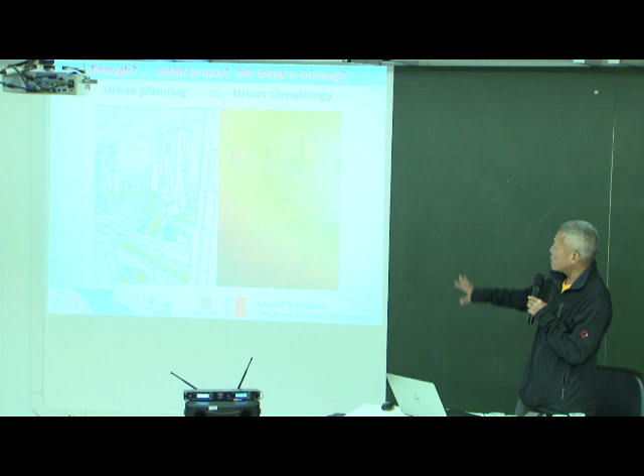So this is the first slide. On one side, a lot of the city planners will draw this kind of diagram to show how nice a city should be or will be. On the other side, the meteorologist always tells you the problem of the city in another way. In this particular case, the pollution problem, and we are dealing with the same thing, but we have a different kind of what we call language, and this is the most fundamental problem when we work with people like them.

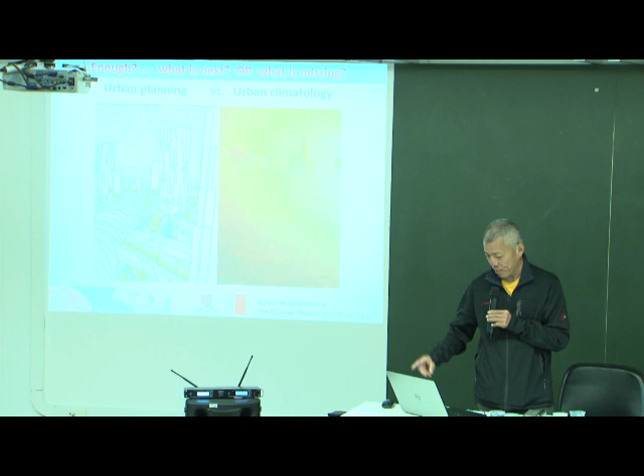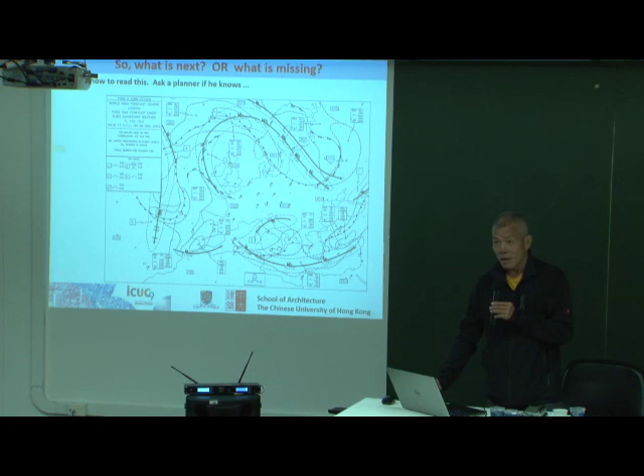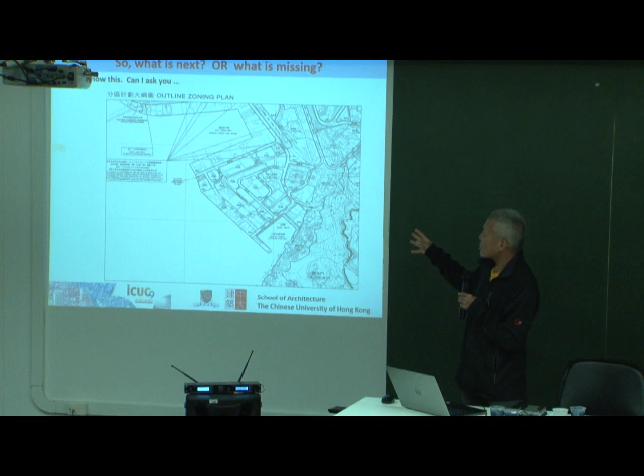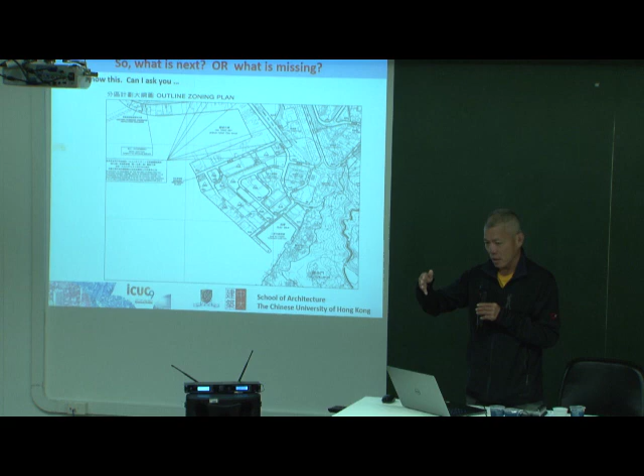So planners also use diagrams like this to signify what the city looks like. But meteorologists cannot understand this. And therefore, they cannot comment on whether or not this is good enough for the city from an environmental point of view. So we speak different kinds of language. And that has always been the problem when we work in a cross-disciplinary manner.

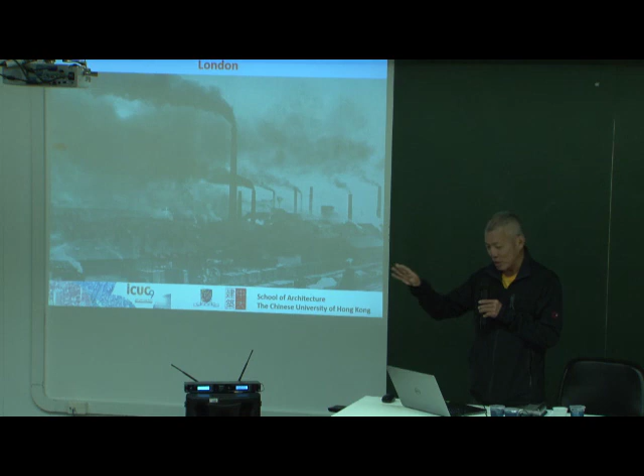So there is what we call the two-dimensional high-density living that you can practice. And London was an example, and they had a lot of problems. And at that time, a book was written to indicate that there is something called urban heat island. This is the first book that captured that in the city, the temperature is very different from the outside.

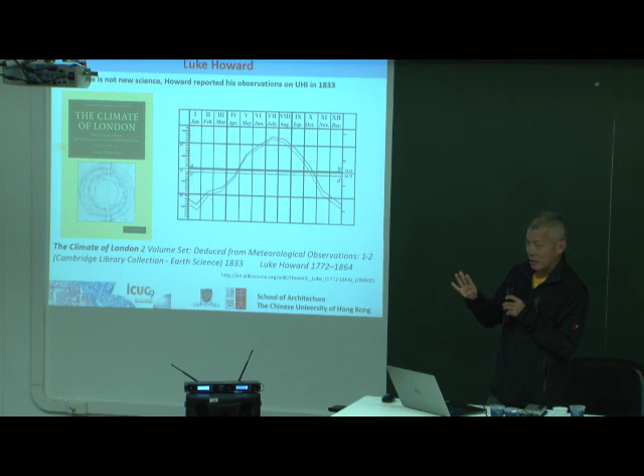And this is the first diagram showing the small difference in terms of temperature and the higher difference in terms of temperature at night. So this book, The Climate of London, written by somebody called Luke Howard, signified that in cities, the climate is different. But he had no understanding of how it happened. Okay, so that was the first book that was published.

Almost at the same time, this other Howard, Ebenezer Howard, published another book called The Garden City. I'm not too sure whether or not they are friends, but both are Howard. They're not brothers. They're just Howard, okay? And he published this book.

And in this particular book, he talked about the future of our city, how our city should be, trying to address the problem of London's high-density environment. In this book, he mentioned garden cities of tomorrow, i.e. people should live in a garden situation. He was not trying to address the problem from a density point of view. He was just trying to make sure that the problem does not continue if London were to be redeveloped.

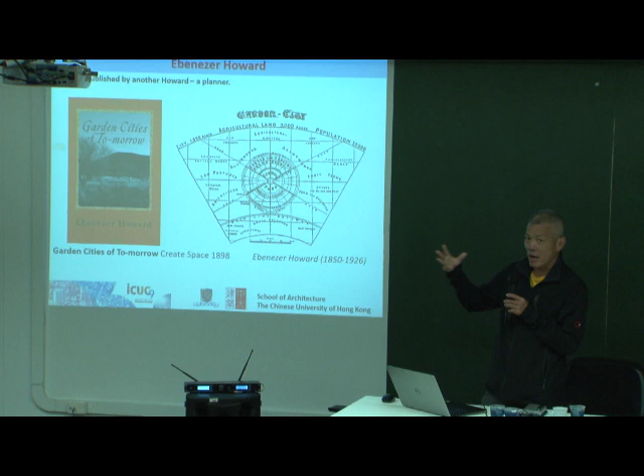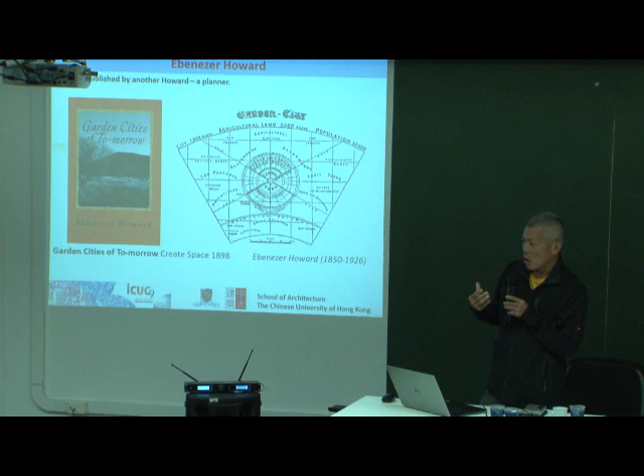So with this book, of course, the London government changed the way that they planned the entire city by putting a green belt outside the city, and also putting satellite cities very far away from the core city and linking them back by transport into the city. That became the town planning model of the 20th century in a certain way. And it all starts with this book.

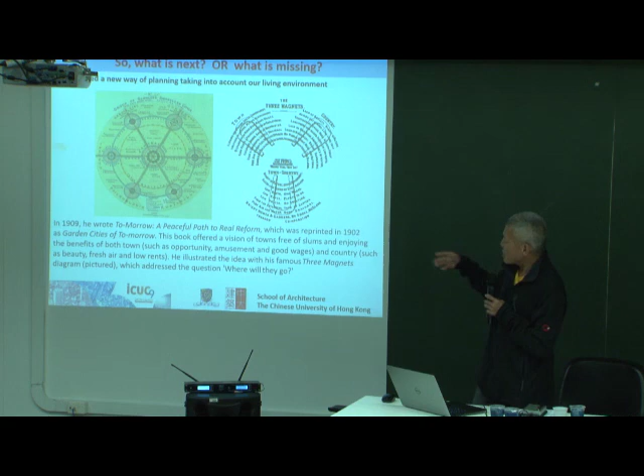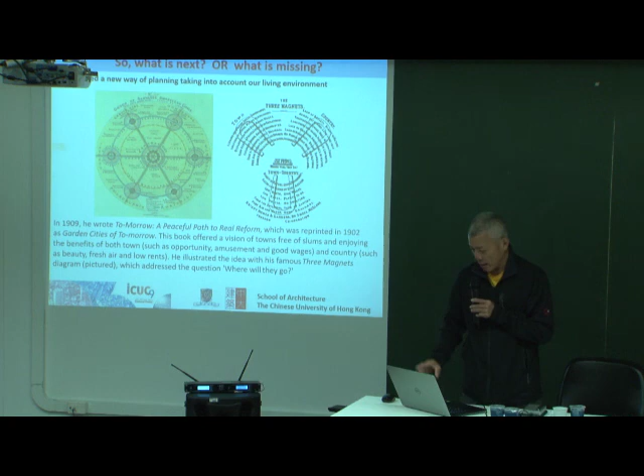And in this particular book, he talks about different kinds of reform, different kinds of structure. And also he talked very much about how the environment, fresh air, sunlight, and things like that should be enjoyed by city dwellers. I'm not too sure, when I look at it, that he had some idea of what Luke published a little bit earlier on the climate of the city. But these two books somehow set the relationship between climate and city planning.

And you probably know this city planned by him, Welwyn Garden City. I actually studied in this city for a year before I went to university. And you can see how the zonings and also the interesting features of how greening should be integrated into the city were planned. The most important thing is the undulation of the perimeters, this kind of thing.

And also the axis that actually goes through the entire city with public amenities, but also very low-density development. This is what they call the green corridor of the city. And the rest of it just undulates.

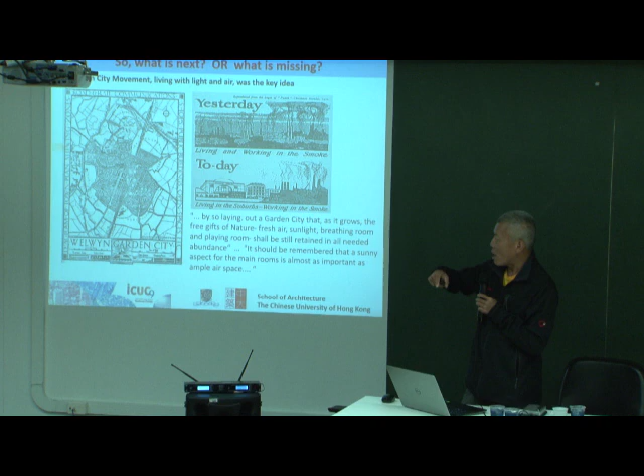So already Ebenezer Howard understood how to avoid the problem of an urban heat island kind of city layout by proposing something a little bit better in terms of urban climate. But at that time, of course, he did not know the science behind it. He was just trying to use his common sense to see how the whole thing should go.

Now, a lot of the time, when I talk to planners, I tell them to go to the observatory and understand what climatologists are talking about and the kind of language they use. And also, when I talk to climatologists, I ask them to go to the planners' meetings to understand what planners are talking about. So you all have to organize a lot of these cross-disciplinary, not meetings, but drink parties. Yes, because when people drink, they are very happy and they try to understand what the other guys are talking about. Otherwise, they sit and they don't do too much.

And many times we have this kind of diverse opinion and also problems. So when you come to the town planning board meeting or whatever, if an environmentalist says something, the planner doesn't like it and says this is rubbish.

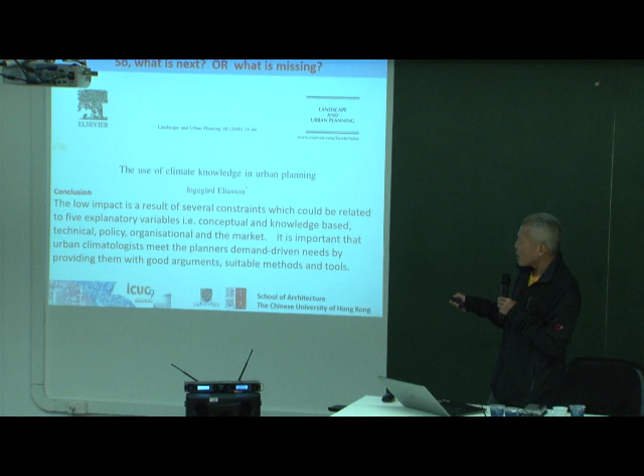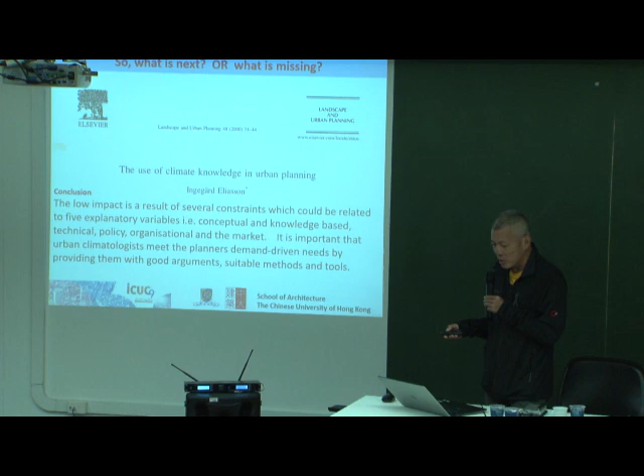So this particular professor was very interesting because she was the first professor who tried to ask the question why we are not using knowledge properly in our planning system, or what kind of knowledge we need for our planning that the climatologist does not give us. So she argued for a framework to try to understand why the two groups do not talk to each other. And she identified a number of problems and defined this wonderful framework: our conceptual thinking is different and our technicality, our models, are very different.

And there are other things that are so different that because of them, you cannot talk to each other. You don't know how to talk to each other. And some things can be done to solve this problem. For example, if we can find a common language so that we both work together in terms of the knowledge, then it will become easier. So this was the first paper, as far as I know, to talk about how the two groups of people, planners and climatologists, can find ways to work together by addressing the differences, from conceptual all the way to institutional.

Lately, I think this year, WMO just published a climate service for urban area guideline for all the observatories in the world to follow in order to give information for planners or for city people. In the past, the climatologists only worried about shipping, farmers, and people who are outside, fishermen. But now they want to give information to city planners and city dwellers.

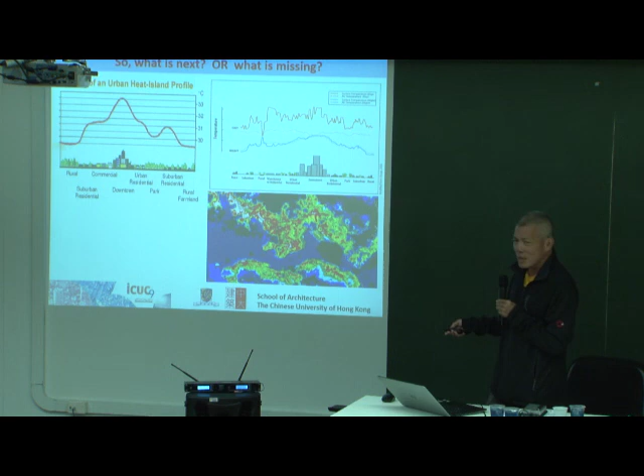And at the moment, the government, Hong Kong, is now putting thousands in the entire city, literally thousands. But nowadays, the stations are very cheap. You only need a sensor and a remote Wi-Fi or something like that. You have a station. So they're pumping in a little bit of money to put in 2,000. And it doesn't really matter where. It's just a matter of covering the ground.

Anyway, so this particular paper actually tells them the capability, i.e. what we know, and then the needs. These are 2 wonderful papers that you should read and you should cite, because my name's there. So you improve my citation a little bit. But I strongly recommend these 2 papers; they set out the fundamentals for the climatologist to look into the urban area.

In the next IPCC report called AR6, there will be a big chapter on urban climate and urban city design, a big chapter. One of those who write it will be one of my students, Chao. She's now a contributing author, and she asked me how much she can write. I say as much as you want, because IPCC reports are this thick, so it will be good, okay?

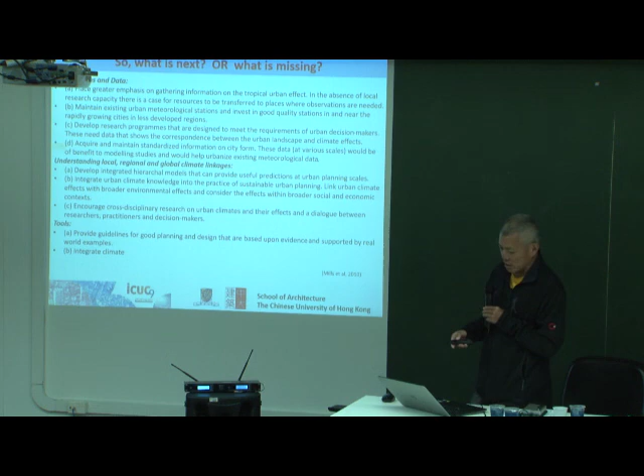And in those two papers, a number of issues are identified. I'm not going to go into that, but it identifies something. And that paper was published by Gerald Mills, one of the key authors of those two papers, about how we can see urban climate in urban planning and vice versa. And this particular paper is almost at the same time. It was about how they applied it to an environment. I think more of that is in the climate book that you have bought.

Thank you. Every time you buy that book, I have a few dollars in my pocket. So I get richer every time you do that. So do that more often and do that every day. And that would be very good. Okay, thank you.

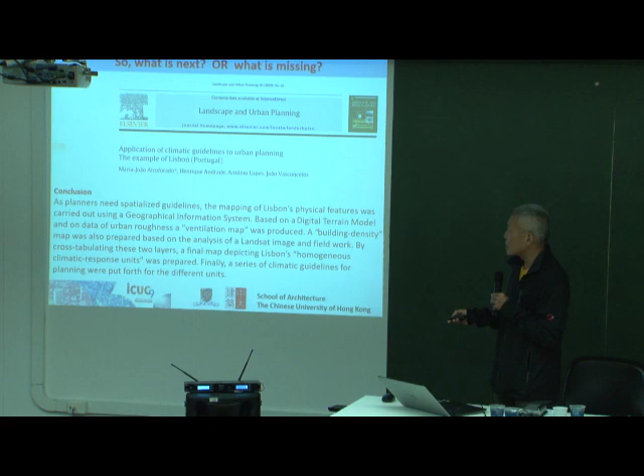They're trying to promote a common platform of using a map-based information platform so that the two groups can come together. Remember, the two groups use different kinds of map. If that map can be understood by both groups, then the chances of communication will be much higher. So that was the thesis behind this particular paper, and of course, behind the book that we subsequently put together.

This paper you must cite, a very, very important paper, by somebody whose surname cannot be pronounced. I was trying to argue in that paper that actually the climatologist or this engineer does not need to give the planner too much information. They only need to say two things, because it won't take too long for you to say two things very concisely. One is how often it happens and how much problem it will cause.

If you tell the politician, somebody will die every day and all your constituency people, half of them will die tomorrow. That's every day or tomorrow and half of them. He's going to listen. If, however, you talk to them about probability and area and all these other funny ratios and things like that, he lost interest.

So you only need to know how often it happens and how difficult it will become when it happens. So when we construct our information, we only need to state what we call the prevailing situation. Forget about in the afternoon at 3 o'clock, something else will happen. That kind of nitty-gritty, he doesn't want to know.

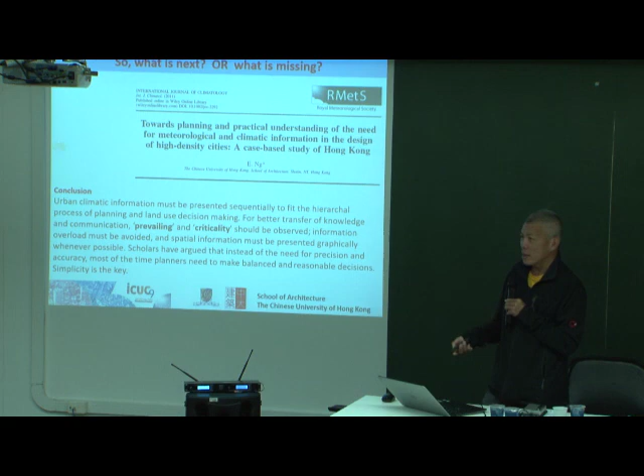So my argument was to construct an information platform that only sticks to these two fundamental principles, how often and how much impact. Then the information platform will be very focused, and the policymaker will listen. And I will show you later.

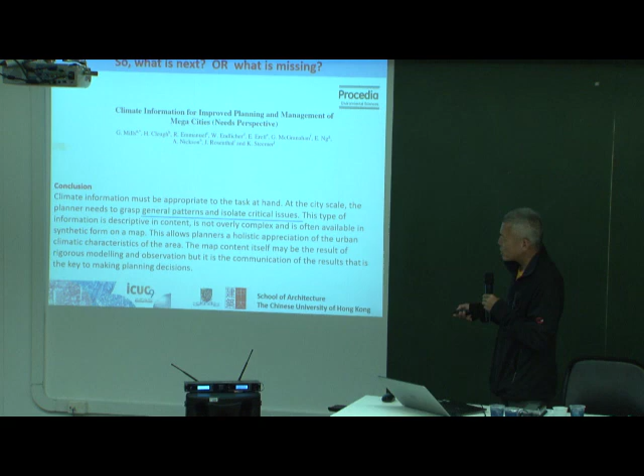So this is again, Gerald Mills also kind of agrees with that kind of understanding. He called it the general pattern and the critical issues. That's the way that he called it. I called it using another two words. But the concept is very simple and similar.

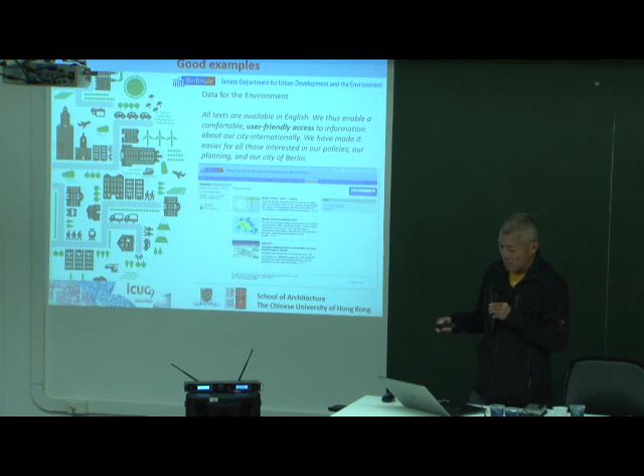Then we looked at some of the observatory systems in the world. We found that actually the best at that time was in Berlin, that they try to not only capture the data, but demonstrate it in a more user-friendly way. They basically tell you how you feel rather than what the temperature is, and therefore once you feel that way, this is what you should do. So this climate service that they provide is a little bit more friendly to people who are experiencing the city.

Now, for those of you who are into urban planning and climate, I must alert you to the wonderful things that the city of Stuttgart did to address the relationship between climate and city. And this is, I think, still their website showing a lot of the information that you should know. They are actually one of the first cities in the world, very early on, to put together the mapping system.

The maps were done by climatologists, but then translated by planners under the recommendations of the climatologists to become planning guidelines. So the climatologists tell them in different parts of the city, the environment behaves differently. And with that difference, the understanding was A and B and C, and therefore the planning should be X, Y, Z. So they put together a climate analysis map, and then using that, they talk to the planners and put together the recommendation map.

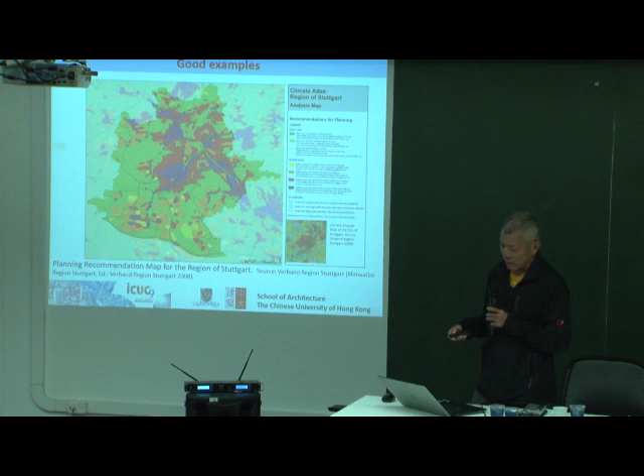The good thing about how they work together is that the climatologists are actually inside the environmental planning department. They are part of it. They are not separate. They are not a different kind of people. They work together. So they have a higher chance of success because they work together.

And based on their earlier work, Chow, my student, put together a review paper, which is very highly cited at the moment, to capture the 40 years of development of this kind of methodology so that the two groups can work together. For 30 years or so, Germany was the only country who practiced it. And then suddenly Japanese researchers found out that it was useful for Tokyo. And now we in Hong Kong find that it is also useful for China. So these are the few areas where we have been trying to use this methodology.

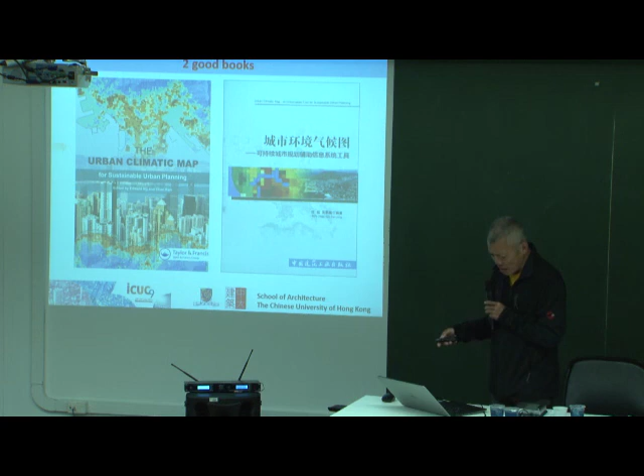Now, this has always been the fundamental framework. The first thing, you have to collect the information in a map-based format. Everything has to be spatial. You have to tell the climatologist to relay the information in a spatial way. We are not interested in average at all. We are interested in high spatial resolution climate information. Once you tell them this is what you need, they can find a way to give you, either by means of data fusion or by means of many stations.

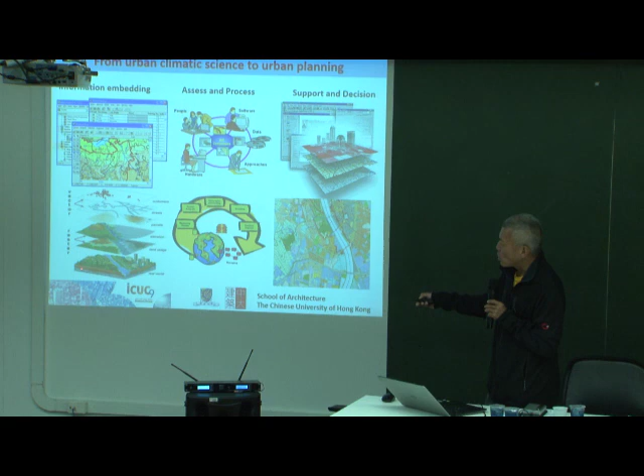Okay, they have a way to do that. But you have to tell them, we are not interested in average at all. We are not interested in the station at the airport at all. We are interested in spatial data. And high quality spatial data are now possible. The climatologist has a way to do that, so you don't need to worry about it. And they give you more information than you need, and you have to embed them together with what we call the city structure data that you have.

Because once you combine the weather data at high spatial resolution with city structure data at high resolution, then you can immediately see where the solutions are. I don't even need to tell you. So therefore, the information embedding exercise has to involve high resolution data. Then you put it together in such a way that it's easy to access, i.e. on a computer, so simultaneously the planner and the climatologist can, in their own offices, access the same data set. And then later on they come together to discuss the support system and the decision-making system.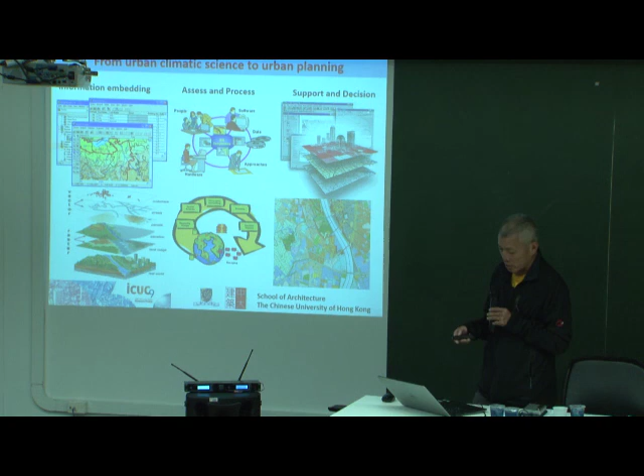And this part will be made easy if these two are structured in such a way, very easily accessible and very high resolution, being the two important criteria for the data. So in Hong Kong, once you have that basic understanding, you then very quickly look at the planning mechanism of the land. In Brazil, I'm quite sure you have a different kind of planning mechanism. In Hong Kong, we have the strategic plan, which is a long-term plan that lays out the government's or the society's vision of the city in the next 30 or 50 years. So it's a long-term vision kind of strategic plan.

You may have something similar, okay, where the city is going, how the city may allocate resources to different parts for what purposes. Those are very fundamental planning decisions that politicians make once every 5 years, 10 years, something like that. And from there, the planner will take the strategic plan and develop what they call the statutory plan, a plan that means something from a land use point of view. And this is where the density and the building height and the zoning and everything else is defined.

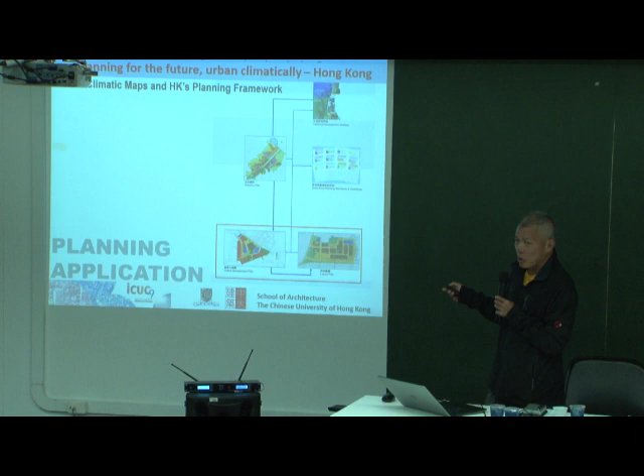And they also have notes that you should read together, saying this is how they define it, this is the meaning of that word. So this is the standard, or we call the guidelines. This set of plans is statutory, i.e. they are legal, so everybody has to follow that. So from the strategic vision to this implementation, there are lots of planning decisions that need to be balanced. And environment is only one of them, not all, okay, only one of them.

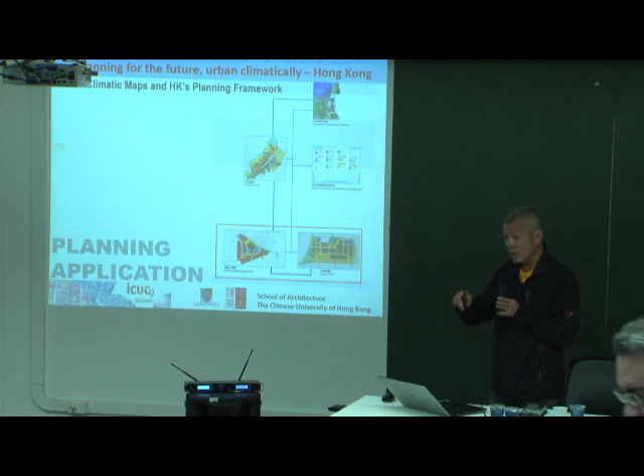And from that plan, the developer or the neighborhood can then say, okay, in that case, that piece of land will be developed in such a way, with the building there and the open space there and the road there and things like that. So this is more what you call the development plan. So in Hong Kong, there are only 3 levels. In Brazil, you may have more levels. It's up to you. Then the next task is to see at which level and by what resolution your climate data should fit in.

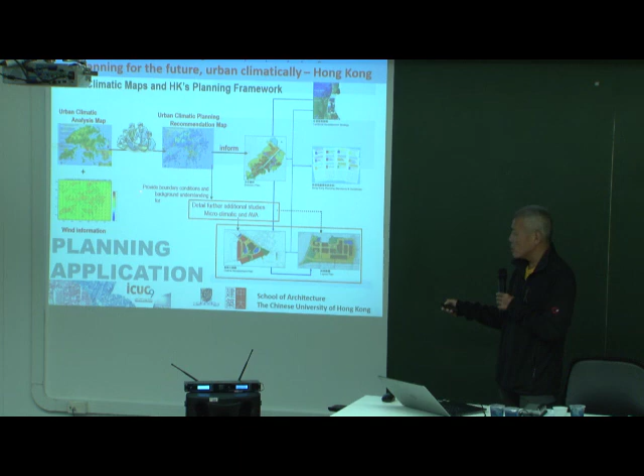So our meteorologists come up with the analysis plan. Then the planner interprets it into the recommendation plan, i.e. every color has a certain meaning. And this area is here somewhere. Okay, so therefore, based on the understanding, this area needs to be planned in such a way. So that plan is always designed using a bigger scale understanding of the city, or even larger, before we come to this plan. And this also gives you what we call the boundary condition for your further studies.

So for example, you want to study the temperature or wind profile of this particular site, embedded into that particular area, embedded into this particular city plan, then you need to use those bigger scale understandings as a boundary condition to drive your simulation or your study. And at this level, the spatial resolution is typically 200 meters by 200 meters, because you only need to worry about areas. You don't need to worry about the right or left side.

But in this case, it's about 1 to 2 meters, i.e. the left side of the street is different from the right side of the street. And this map can never give you that information, but using this map with further downscaling, you can come to that understanding. And the downscaling will be scientific, therefore the understanding will be scientific. So this is how the weather data or climate data come into affecting different parts of the planning process.

And without this understanding, the planner will ignore you at the wrong place. If you show this map to these people here, they will ignore you. Okay, they won't listen because it doesn't give them the information for this understanding. So you have to be very careful about the different scales of understanding. The planning scale for this is 1 to 5,000. The planning scale for that is 1 to 200.

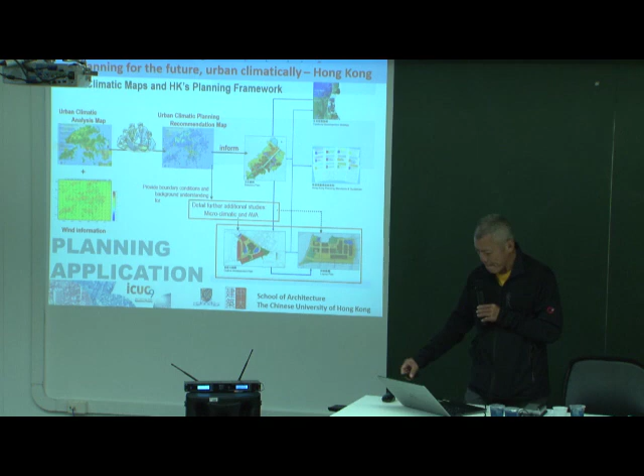This is an example that we demonstrated to the government a long time ago now, when I was still a bit younger, of how the map that we create can be used to structure the redevelopment of this area. This area is 300 hectares. It was the old airport. Now the airport is here. But this big chunk of land next to the core of the city needed to be redeveloped. For 10 years, they left it empty because they had no idea how to do it properly.

And then we drew up this particular climatic map showing that if they do it in a certain way, it will not affect the surrounding neighborhood, and it will actually give them some benefits. So when you present this kind of vision to the neighborhood, they won't say no. Otherwise, they will forever give you a hard time. I'm telling you that whatever I do will provide you with further amenities and also goodies, but it will not affect you at all environmentally.

So you will still be comfortable, but you have a park to go to next door. So the access to the central park is easy and straightforward from there to there. And also the orientation of the lot is positioned in such a way that they don't block the most important

incoming wind. As you can see, this is the runway. The runway always faces the wind. That's how they build runways. So the wind always comes from that direction, and therefore everything else is zoned accordingly. And all these lots have their own restrictions, like land cover restriction, plot ratio restriction, building height restriction, so that the idea is not to affect the surroundings environmentally.

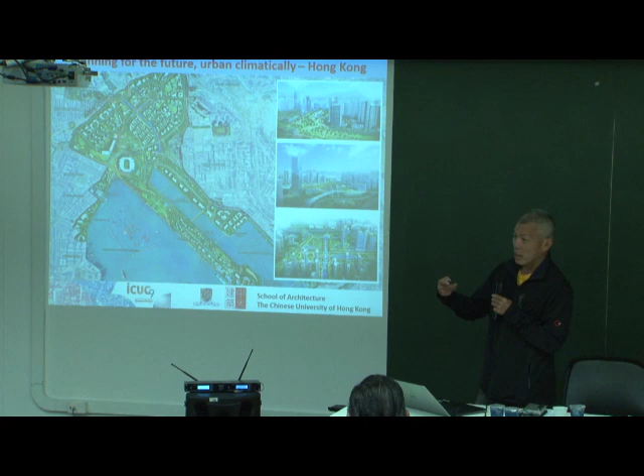do more. And in that case, the government then decided that, okay, the ground coverage of those is only about 30%. And then I say, okay, once you do that, then you have to set 30% of the site area as landscaped area, trees, okay? Or 60% grass. But developers being developers always do 30% trees instead of 60% grass, because the other 30% they will use for a shopping mall. Okay, fine, no problem. You still do that, but then you give the neighborhood back the amenity, and then you do whatever you need for your density.

So this particular site, the overall density is very high. It's about 7.5. But yet the ground coverage and the tree ratio will dictate the most important environmental condition of the site. Elsewhere, I think we then say, okay, the Central Park should be here somewhere. The hospital, I think, is here. Hotels, schools. There are schools here, something like that. So this becomes the guiding principle: not to form a high frontal area density kind of neighborhood, but more a dispersed, but high-rise kind of neighborhood.

That's it. But then we went in and suddenly we realized that this is the worst way to solve a problem, i.e. do not try to make the city the same, i.e. don't increase all of them at the same time. Try to increase them in different ways. Then we give them some simulation.

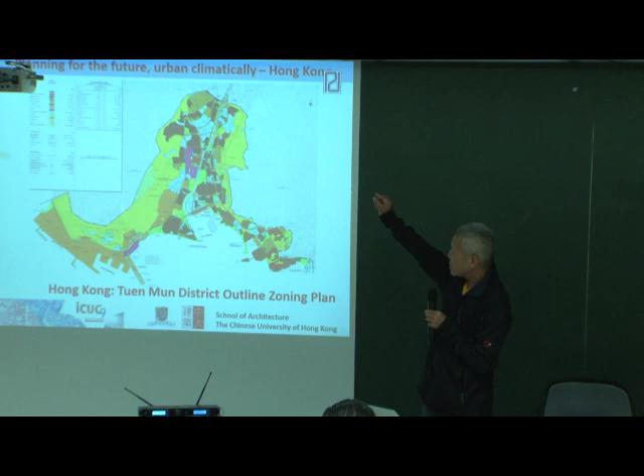But at the same time, you have to do building in such a way that it is highly inhomogeneous, because only then can you create different kinds of environment inside your city. And people who like one kind of environment will go there, and another kind of environment will go there. So we told the government, okay, if you want to do that, you have to identify the lots that you can give 50 meters higher, and other lots that you cannot give anything.

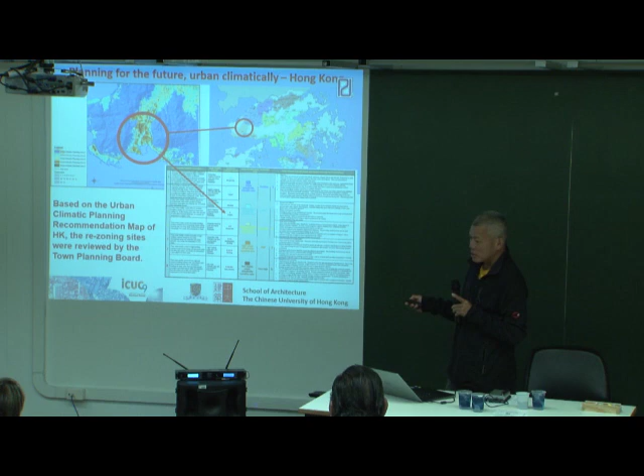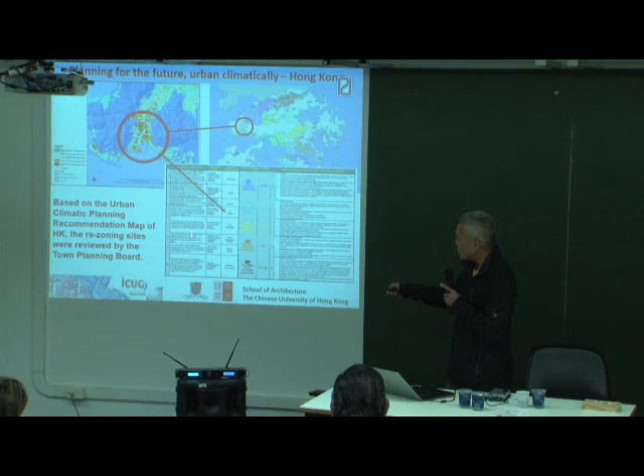So the government, then there are ways to do that. So based on the map, we allow them to find out a few areas to test out. This is the main one that we talk about, a big piece of land that we can allow. But then if you do that, you have to do something else. You cannot just increase the height and do nothing. So this is the area, this is the map, and there are notes saying what you should do and what you should not do where. Okay, this is the note that we put together for the government.

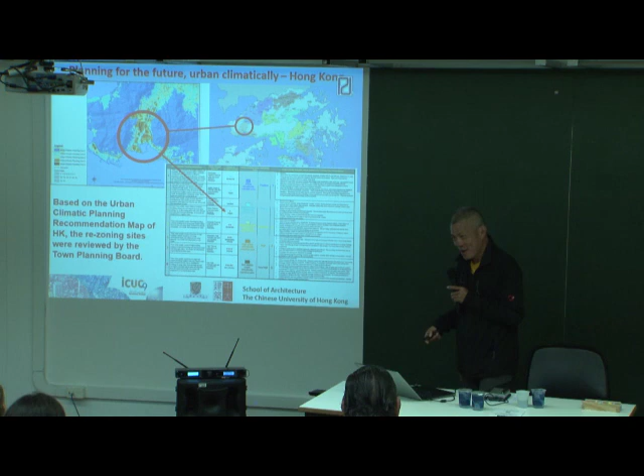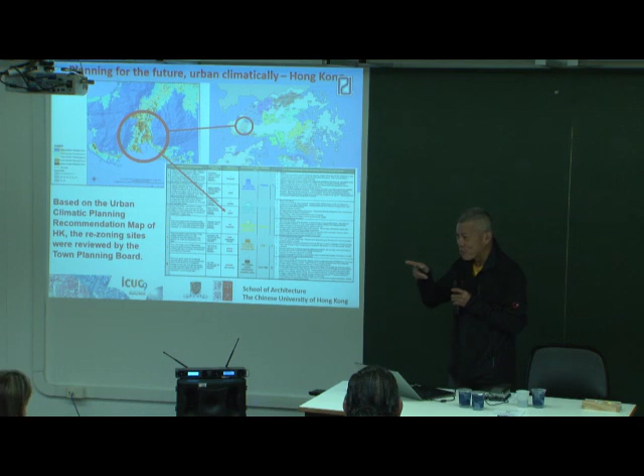Oh, this is, by the way, Ren Chao's PhD thesis. Her PhD thesis basically sets up the planning guidelines for the city for the next 30 years. So therefore, this thesis is embargoed, i.e. nobody can read it. It's locked for 10 years. So until today, I think nobody has read her PhD thesis yet, because otherwise people would know exactly where to buy their next piece of land. Anyway, it's good for a PhD to do that, yeah?

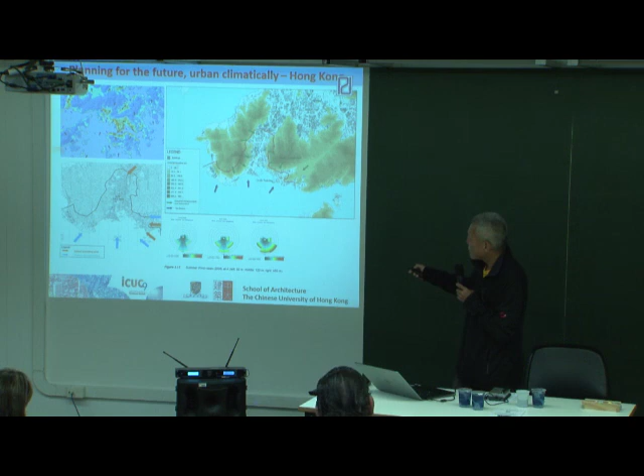Anyway, so these are telling you what to do. And then we also tell the government these are the wind conditions and the thermal conditions and topography and the downhill flow. There are a lot of hills around it, and they have downhill advection to different parts of the city. So if you build there, for example, you block the entire downhill, so you affect here as well. So you save those downhill flows and then maximize the sea breeze.

And therefore, this particular site that you develop must have a few features incorporated into your plan before you are allowed to develop. So the government then sets up different zones of the same site, saying this zone you can do this, that zone you can do that, there you have to do something else to compensate for your higher density and higher building height. So this is the way that we give the community the opportunity to build, to densify, and not to affect the environment. This is one example. We have many more of those.

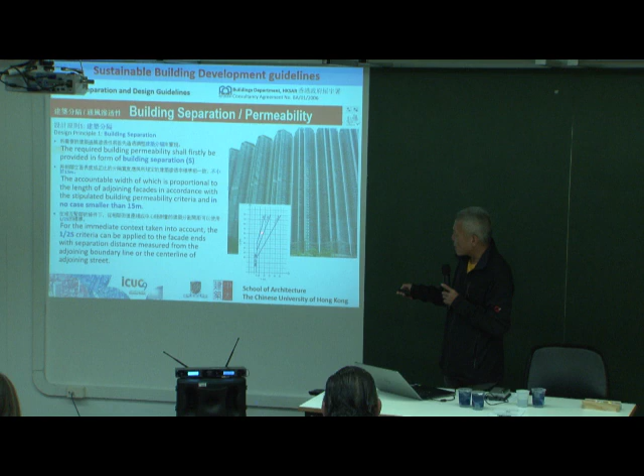And then, in another exercise, we try to prevent people from doing this. This has a very high frontal area density, as you can see. So we do calculations to say if your building is this tall, you must have a certain gap between the towers. So that was the whole idea. We called it the permeability ratio.

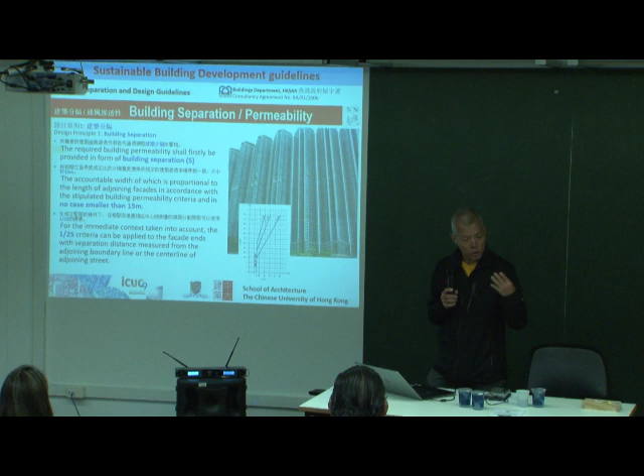Now, what we have found is that by the time your building is tall, say 30, 40 stories high, the two-dimensional way of looking at your building from plan is not going to be very useful to devise better regulation. It's the three-dimensionality that becomes important. So therefore, the section becomes more important than the plan. So the planner will look at your section as well as your plan, i.e. they look at your ground coverage, but they will also look at your permeability, a three-dimensional vertical ratio, to guarantee that your ground cover is low and your permeability is high, or of a certain percentage.

So therefore, when you come to a high-density way of designing a city, make sure that you always look at the city three-dimensionally from a section point of view. You regulate it using section. You don't just regulate it using plan. That's gone. So from time to time, we come to that. For example, daylight calculation, we used to regulate it horizontally. But now in Hong Kong, we regulate it vertically, okay, taking section into account.

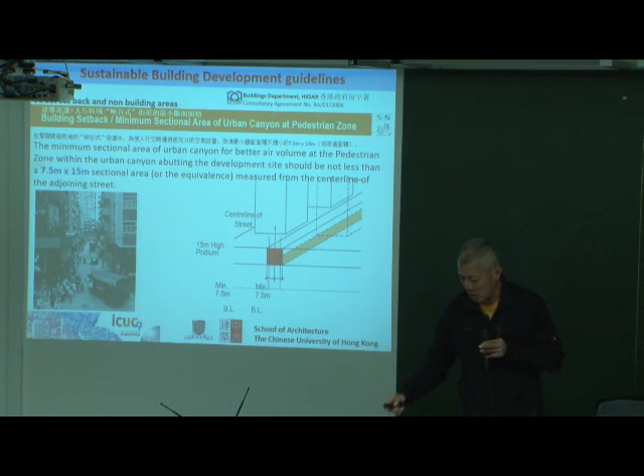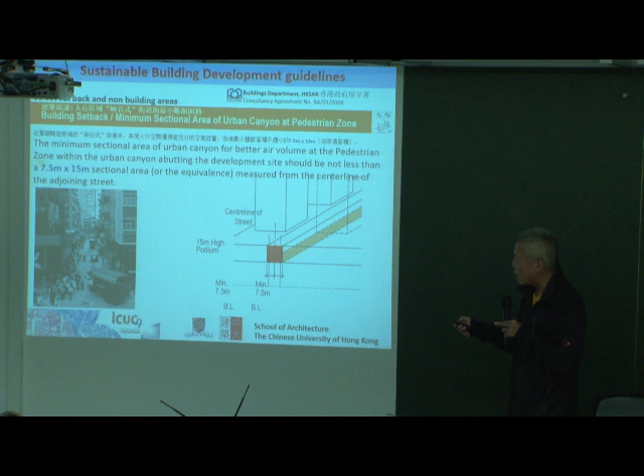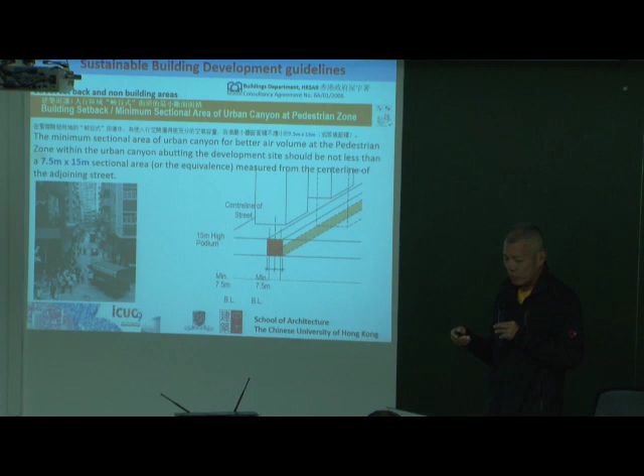And also the lower part of the city is more important to get right than the upper part of the city, okay? So concentrate 90% of your effort, of your regulation, of your rules at the lower part. For example, in Hong Kong, the lower part of the city is defined as 0 to 30. And then we therefore regulate how the podium occupies the site, how the narrow street should be recessed on development, and how the tower touches the podium at the lower level. So we develop many ways to make sure that at the lower level, 0 to 30, it is much more permeable, much more green, a lot more shading.

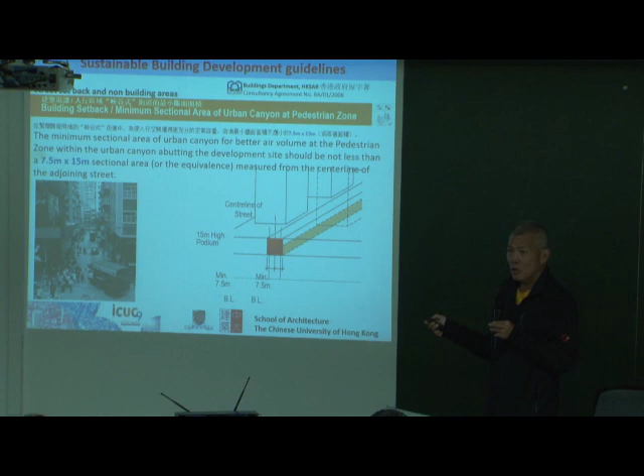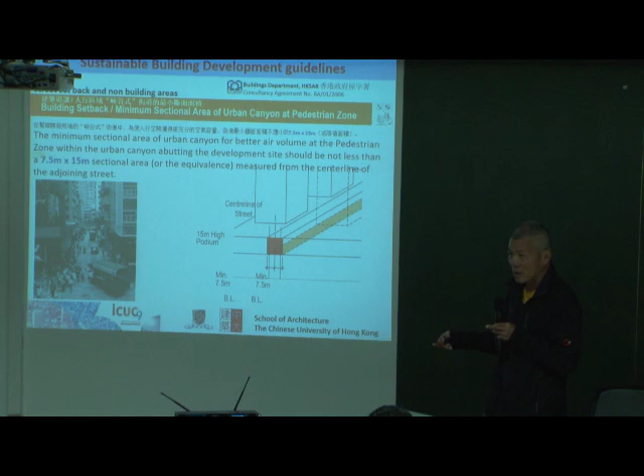And up there is not that important. For example, whether this tower is 50 story or 60 story has absolutely nothing to do with the lower level. It does not help you anymore, or it does not give you any more problem. But whereas if you forget to do it properly at the lower 30 meters, then the whole equation is gone, the whole battle is lost.

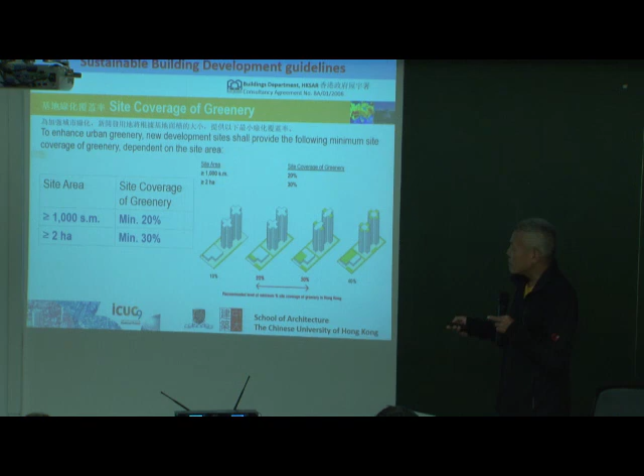And of course, greening is another important thing. In the past, we allowed roof greening, but we found out that, forget it. Everything has to be on ground. At the 0 to 30 layer, you put in all your 20%, 30% required. Anything up there, not useful, okay? So we actually develop formulas that they have to do something if they want to build a little bit more. This is the requirement nowadays.

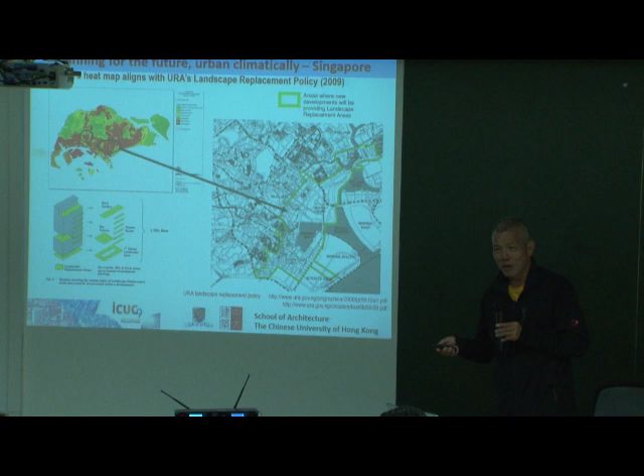Then I told my architecture student, next time you forgot to draw or design your elevation, it's easy, just cover it in trees. And your tutor cannot give you a hard time because they cannot say trees are not beautiful, yes? And they cannot say trees are no good because it's all trees. So nowadays, my students don't need to do elevations anymore.

All trees. This is one example that they put in, but then I told them that this area also has to be green. And I also told them that if your trees are like umbrellas, it's much better than if they are straight. And so therefore, this particular avenue was fully covered by trees all the time.

And nowadays, the government of Singapore uses that as a slogan. They say not garden city, but city in a garden, the other way around, to celebrate their achievement. It's very good. So architects can use this kind of climatology information for aesthetic and also planning advantage.

How long do I have? Am I running out of time? Are you bored? No, not bored yet. How many of you want to sleep? Okay. If you sleep, can you please make as little noise as possible?

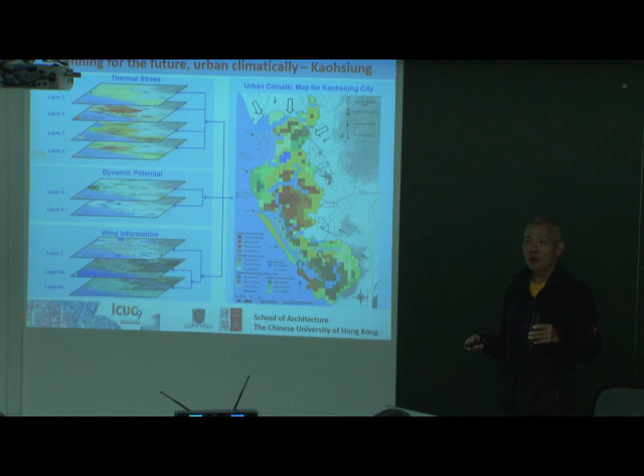Otherwise, carry on. This is Taiwan, which we did another. Taiwan is again a tropical city, hot in the summer and not very cold in the winter. So we again lay out all the information. We then combine that information into a climate analysis. And we identify a few areas that may require certain help. And there are some areas that have a lot of goodies.

And since the wind direction is from that area, from the east, from the west, we told them that you should find a way to benefit this guy. Now, without this kind of map, you cannot use something that is 5 kilometers away to help you. There's no planning mechanism to do that. But with the map, you know that a little bit of landscape area assisted by the sea wind can help you 5 kilometers away, provided that you do something.

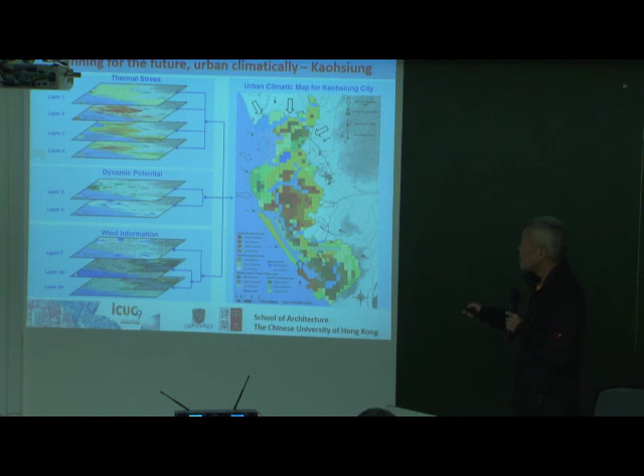Okay? So the government was very keen that in order to solve this area, they need to do something here. This is the area where they must maximize their effort. The other areas are okay, no problem. So they don't need to worry too much about it.

However, we told them that actually your city can be defined climatically into 10 zones. Each one of them, the name of the sub-area is there, has different kinds of needs for attention. Do this, don't do that. Two stars means important, okay? Do more of those. One means good, but not that important.

So different governments can then tick different boxes because they are in different areas. So their help comes from different sources. For example, in this area, the help comes from the annual wind. In this area, the help comes from the sea breezes, i.e. nighttime. You must find a way to flush the city at night with cool air.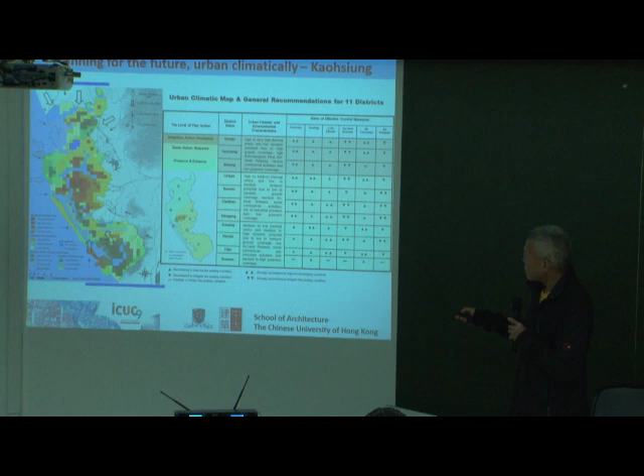Then in the daytime, first thing in the morning is better. Things like that. There are different helps, and there are different techniques. And we told them that fundamentally to improve the city, there are only 3 techniques. Only 3, no more. Wind, which flows in a certain manner in your city, and your building engages the wind in different ways, and do that, don't do that, and things like that.

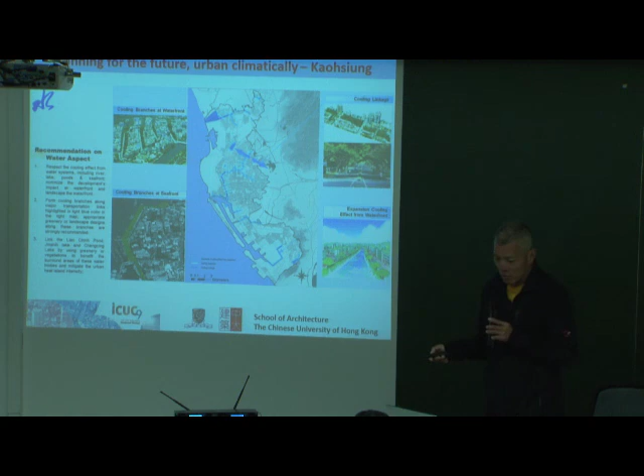Water, the water body is again something. If you have a water body, keep it at all costs. Fill it with water, okay? Don't let it dry, so that they channel the goodies to other parts of the city much quicker than anything else, because the water has very low friction. So therefore, these hills are there. The city therefore needs to maximize this kind of hill-water dialogue between the two.

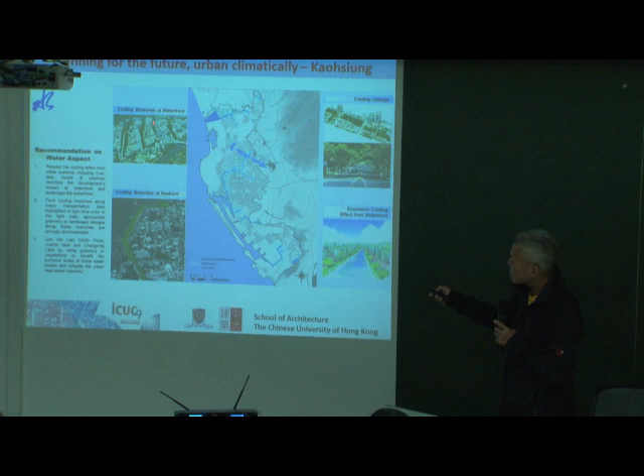Okay, so water. Third thing is of course green. Okay, 3 things: wind, water, green. That's it. And your building has to somehow find ways to maximize how these 3 things come together. Now, it's no point to have these 3 things isolated. It's very important to connect them.

So the whole idea of the city planning is to try to connect these 3 things from one area to another one, so that they can benefit each other, they can flow, the element can flow. So connectivity is more important than the open space itself, okay? So that has been another advice that we give to the government. So all the time we draw lines because these elements flow via those lines.

Okay, so we say, okay, in green, you have to do that. Some of the area, if you want to benefit this, you need to pedestrianize 1 or 2 streets and plant trees, let the cool air continue. This is the artistic rendering of the city in the future that the mayor then tried to sell to the citizens. Say, my city is going to be like this if I were to be re-elected. Oh, she was re-elected, okay?

This is the hill, this is the sea, these are all the goodies that this hill will bring down. So some of these are vegetated. And then coming to this particular piece of land, I say, don't do much here, make it into an open park. You can build your building somewhere else, because this is the beginning of your city. And try to line this up if you can. So this will then flow through.

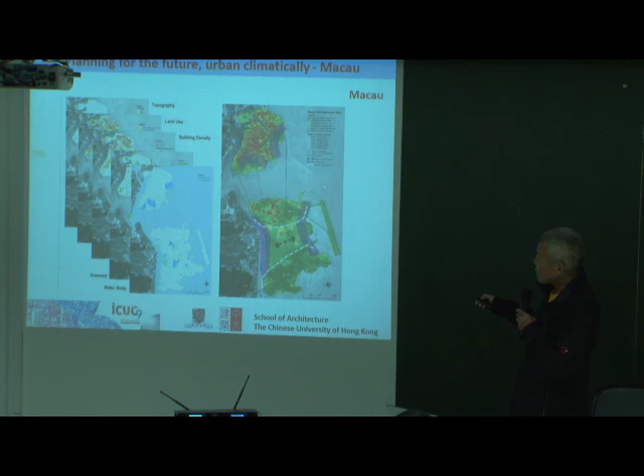If you put something there, and since your wind comes from the east, then you're going to have a lot of problems. Can you put it somewhere else? Can you put it here? But then put a small one there because you really need something. But don't touch this water body. Put your land a little bit away from your main city, which is here. Then the ill effect of this piece of land, since it's very narrow, not a lump if you put them together, will affect your main peninsula less.

So we did a very complicated fluid dynamics study, say how far this needs to be in order that this piece of land is not affecting the circulation of that piece of existing land. Because if you put them very far away, A, it's very expensive, B, it's very difficult to connect it back. So the government is going to give you a lot of trouble. The engineer will say, oh, it's too expensive, cannot do it. And then that's it, you're dead.

But then if you can show them the optimum distance away from your mainland, then we control two things. One is the distance between these two, and the second one is the length, the depth of this land.

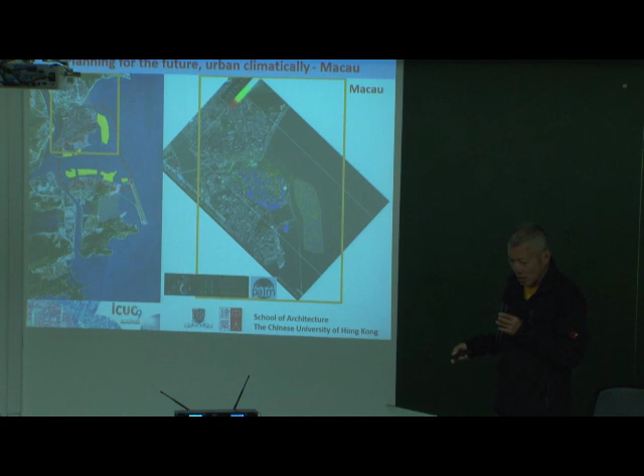You say, try not to bump it there. Try to do it like this. And of course, in that case, they have to build a few more bridges, but then you justify it. So we did a lot of study.

This is the study that a German researcher, Sigi, in Hannover, helped us with. And this is the world's largest LES. How many of you use fluid dynamics? Okay, anyway, LES simulation. You know LES eats up your computer in no time at all. This is a 6 billion grid LES. It's the world's largest LES simulation.

And then we asked the German government to help. It's very good. The German government said, how big a computer do you want? Then we specified a computer that we want, and they actually bought it. I think it's 30 million euro, something like that. Just to do this. And they say, why you have to do that? It shows German technology is world leading. Okay, fine, thank you.

So currently, we are actually giving them another problem because it's time for them to buy a new one. So we set up another simulation, 60 billion grid for them. I say, this is the simulation we want to do tomorrow. They're buying a new computer, another 30 million or something like that. The German people are very rich. If you give them a hard enough task, they will do it for you, free of charge. So they're doing a lot of simulation for us, free of charge, and it's very good.

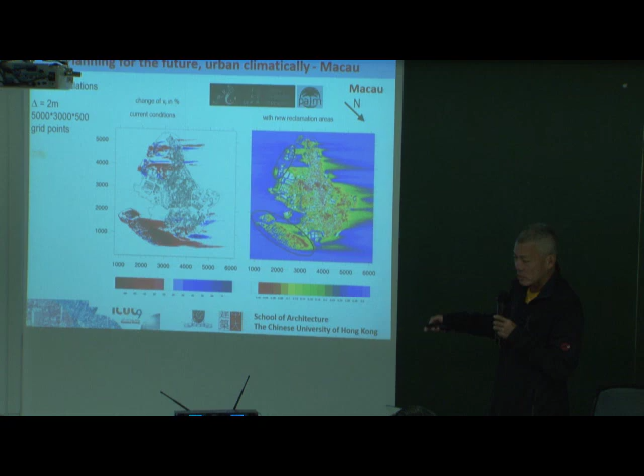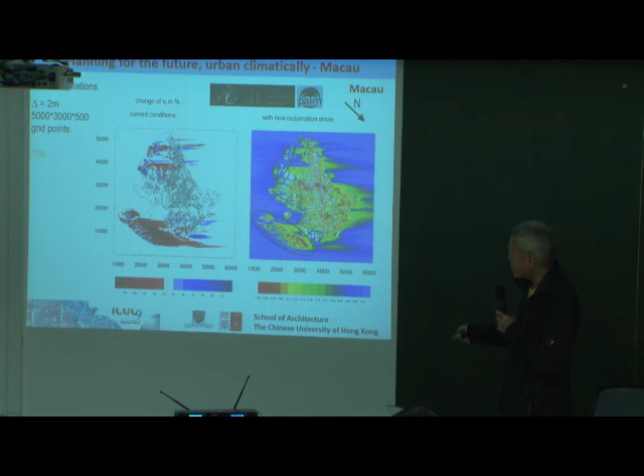So they're very happy. So sometimes this kind of simulation, although very scientific, when you communicate to the old lady living there, you have to tell them that in no time at all, you will be able to enjoy the seafront and the promenade with a good shaded area for you to sit. And they will be very happy. And we also set up a few guidelines for them when they try to redevelop. This one I don't want to go into.

So all the time from the WCC3 paper to the city, we're finding ways to communicate between the two groups. And if you have to find a way to do that, then you may wish to talk to your meteorology department so that some of them could be interested to become your team. Then your voice will be louder because it's more scientific. But then you have to translate it so that the old lady understands.

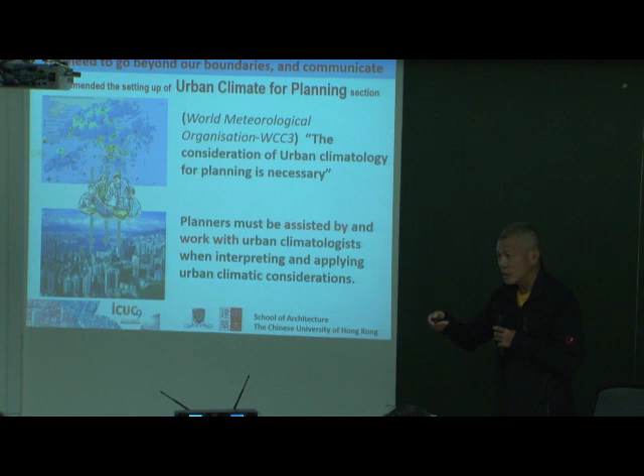So whatever we have done, we are only starting to do it. But I'm quite sure our second generation, you guys, is going to change the world. Change Brazil to start with, okay? Brazil is bigger than China, I've been told. Land area, similar. So if we change Brazil, it's the same as her changing China. So it's the same problem. Okay.